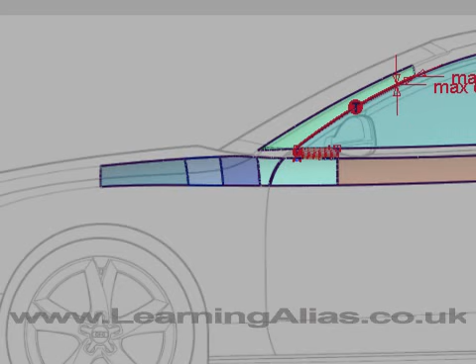learningalias.co.uk, and I'm here today to talk to you about the student's work and how he can improve the situation he has with his A-pillar blend. The A-pillar blend is one of the most tricky parts on the car. Let's start off by telling you what's right.

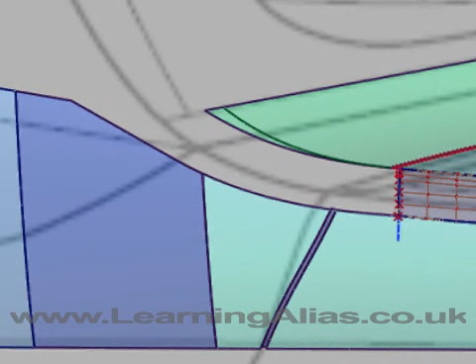When we look down here, we see that we have a nice flow here of the A-pillar round into the screen, and I've checked that and there's curvature there, and we have a nice progressive flow here, and we know we must check that with a curvature comb. So let's do that now.

You can see straight away that the trim edge is terrible, so we need to untrim, delete the curves on surface and project a new curve, and then test the curve on surface with a comb whilst you still have the projection curve in place, and then you can slide the CVs on the projection curve to improve the curvature here, the smoothness of flow.

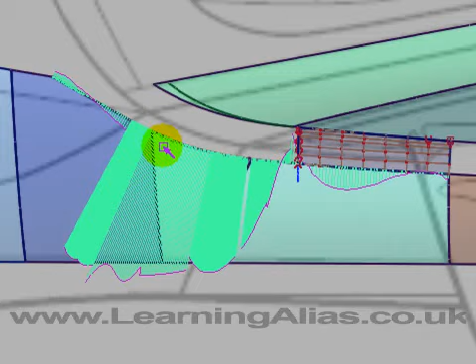You see this is all over the place, and you're going to really fight to get G2 with your patches onto a trim edge like this. This is the curve that I'm going to replace it with. You see it's much smoother. Let's project it onto the surface and then check it again.

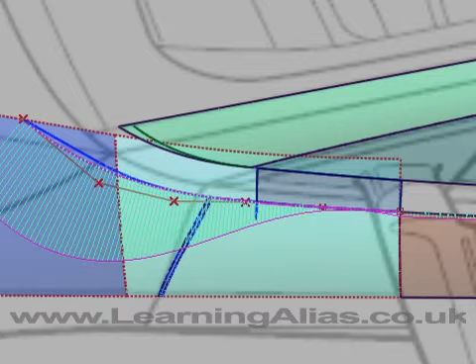Whenever you're projecting onto a surface which is accelerating away from you in the view, then you're never going to get a perfect curve on surface, but let's have a go and see how it goes. You can see that we have a much smoother curve now.

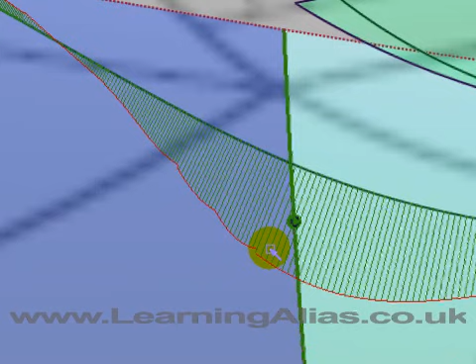It's not perfect. It's got something which is quite worrying actually, that little break down there in curvature, and you can see we've got curvature between the two surfaces, so that's not the problem. The problem is probably some erratic CV behavior on this surface here. In fact, we could take a quick look at that.

I've realigned this now to get rid of that kink there, and I used the projection mode in the align tool. You notice that the student has this line here for the top of his blend, and the first thing that I'll say about that is that it's not sympathetic to this footprint of the blend here. You see it's curving upwards, so you'd expect the top of the blend to curve in a similar fashion, and that would be your starting point. If that didn't work, you try something else, but you definitely wouldn't want it pinching down like that.

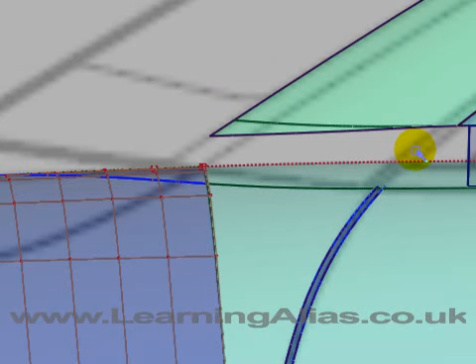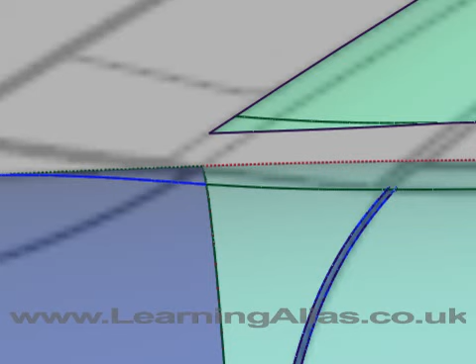And another very important point is that this foot of the A-pillar, which is the top end of the blend, has to be G2 to this trim surface here on the side glass, otherwise you won't get the blend flying along the side of the car. So to get this new trim curve, just put a degree 3 or 4 curve here and align it to this trim edge, and then hand model it, and let's have a look at the comb that it's giving us.

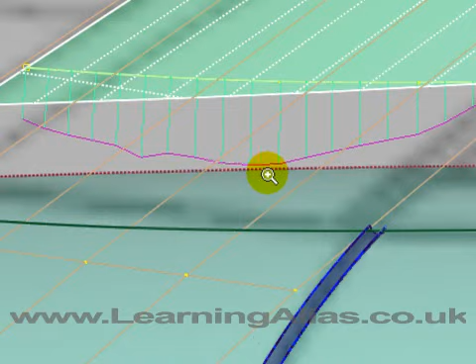You see it's a bit jagged there, and that is probably because of the CV distribution on the hull there. Let's have a look. Actually the CVs look very good. They're very nicely aligned, so that isn't the problem. So I think we could perhaps adjust the projection curve, so let's do that. There's the curve looking a lot better. Let's project it and then test the resultant curve on surface.

And there it is, looking a lot smoother, a lot better, much more chance of getting curvature along here, and a lot easier to do so. So be very careful with your curves on surface. Always examine them, and don't accept second best or third best. Get rid of them if they're no good.

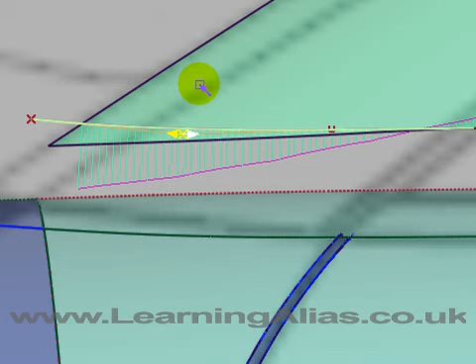I'll show you just quickly. We could also slide a CV on the projection curve to improve. We can't slide that one because it's influenced by the alignment, but you get the idea. That's a good example there. If I slide that one there, you see how it ruins the curve on surface.

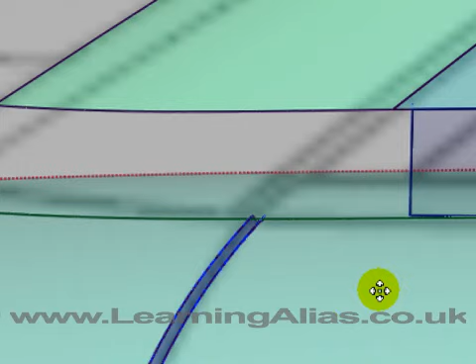I've put this groove in here which lines up with the parting line at the front edge of the door, because I'm bearing in mind as I'm working out my patch layout here that I can lose any problems with getting G2 to flow through here with that parting line. Then I want to show you something which is a definite no-no here.

This student has built a patch there, and the problem with that is that first of all it doesn't end in the right place there. There's no point in ending a patch there with a gap. It should end at the end of this trim edge here. And the other problem with it is that it's working the wrong way around.

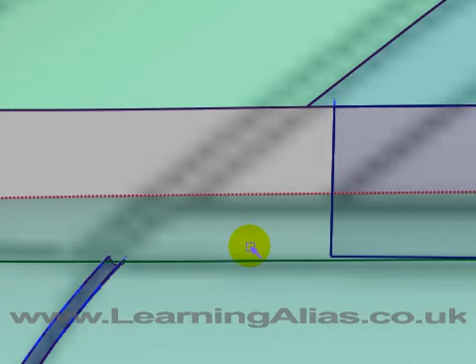First of all, we build the A-pillar blend. We don't know what shape the A-pillar blend is going to end up exactly, so we build it first, and once we've built it, we then model from the edge of the A-pillar blend back along the side glass and shoulder blend to the C-pillar. So we do the C-pillar, we do the A-pillar, and then we fill in with another blend here. So this blend is driven by the A-pillar blend.

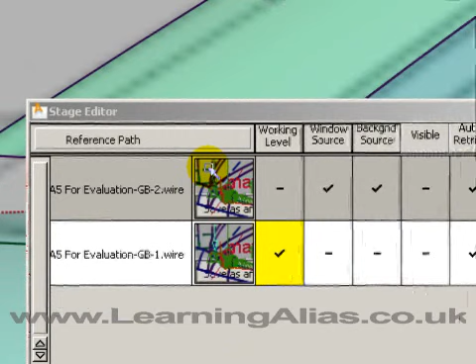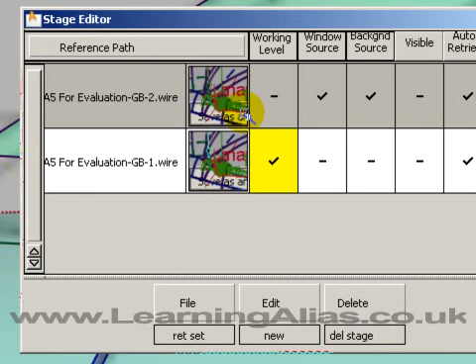I've brought up the stage editor here, and for those of you that don't already use it, you can have several files open at the same time in Alias. If you want to see them through for reference like so, you just make them visible here, but normally I have those checked off. And then if I want to switch to the second issue of this wire, which is that one, I can do so like that. I'll just move that editor out of the way.

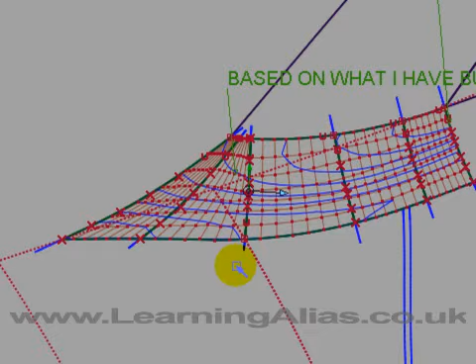Okay, so this is the A-pillar blend. Let's have a look so I can talk you through how it's constructed. So you've seen all the preparation, and now it's just a question of talking quickly about curves. Each one of these curves is built to a construction plane. I'll put some curves in for you so you can see how that's done. We'll take the palette and we'll go to construction.

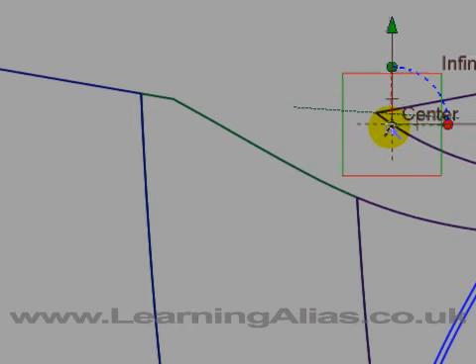We'll take a 3-point plane, and then go to F5 now. So that's my first point and my second point there. And that'd be one curve. My next curve, I want very close to that. From experience, I know that's where I'm going to need it. So I'll take another 3-point, and I can float. I can go anywhere on the surface, but I'm going to put it on the edge of the surface there, about there, and I'll just put all my planes in. And these are all the planes that I think I'm going to need.

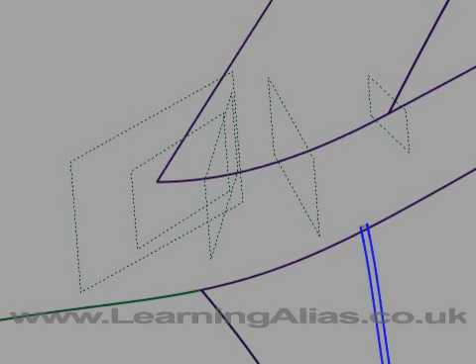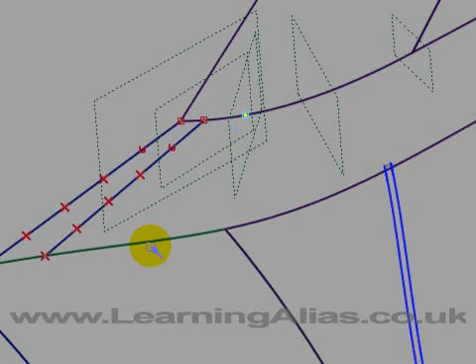So now we can start putting in some 5-degree curves. The curve snaps to there, and another point there for you. You see, you get the yellow cross, and I can go along, and the planes do a wonderful job. So I'll do all those, and I'll get back to you.

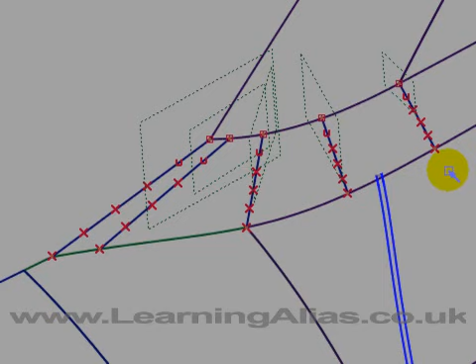There are all the curves in place. Now I need to extend them, project, and then align them. And one thing I should mention is that curve there. If we come and look at it in F6, we see that it's nice and vertical, ready to build this theoretical side glass to shoulder blend from later.

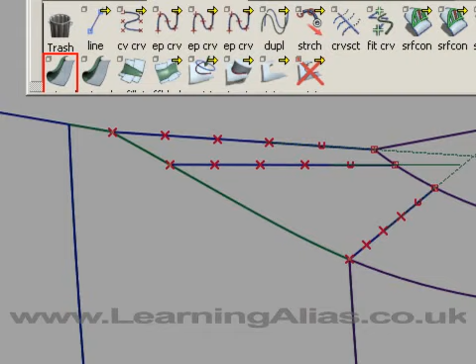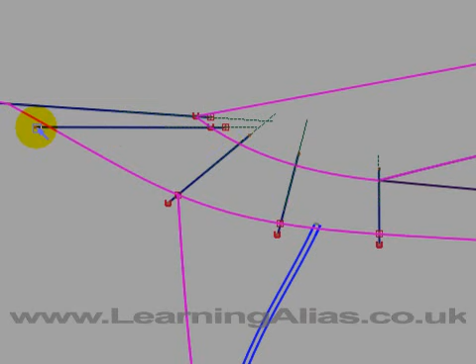I'm using an instance of the extend tool set up in my shelf permanently. It's extend, merge off, linear, and then hit go, and then if we hit the curve we get a nice little curve which isn't attached, which we can use to project onto the surfaces. So that's all done. Control Q on my keypad is project. Pick all the surfaces you want to project onto, hit the space bar, and hit the space bar again. Now you've got to delete all those little curves you don't want.

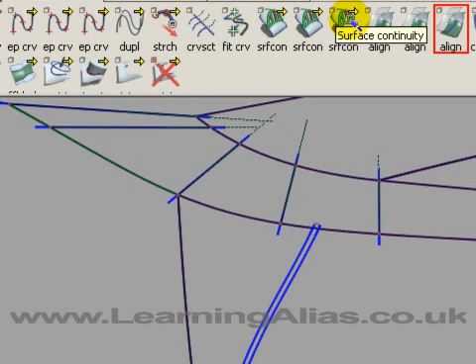You can see in my shelf here that I have instances of the curvature locator and also of the align tool. So I have one there for G0, G1 and G2, and for most of the tools I have these in my various shelves. So now we want to align all these curves to our curves on surface, and I'll go along and do them all, and then I'll come back to you.

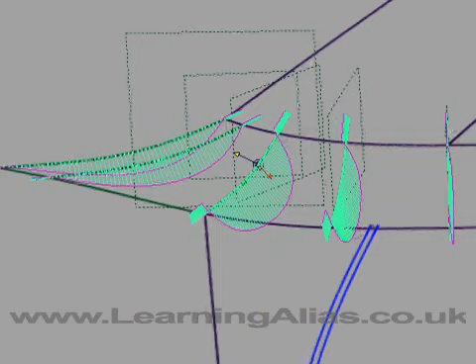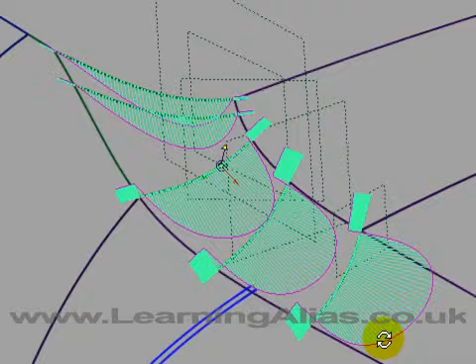Check all your curves with a curve comb. Make sure that they are planar. You can see planar, planar, planar. That's very important. If you don't have your boundary curves planar, then you're asking Alias to do a hell of a calculation each time you're trying to build a surface, putting a lot of strain on the system, and you're hardly likely to get perfect results if you don't give clean input to the system.